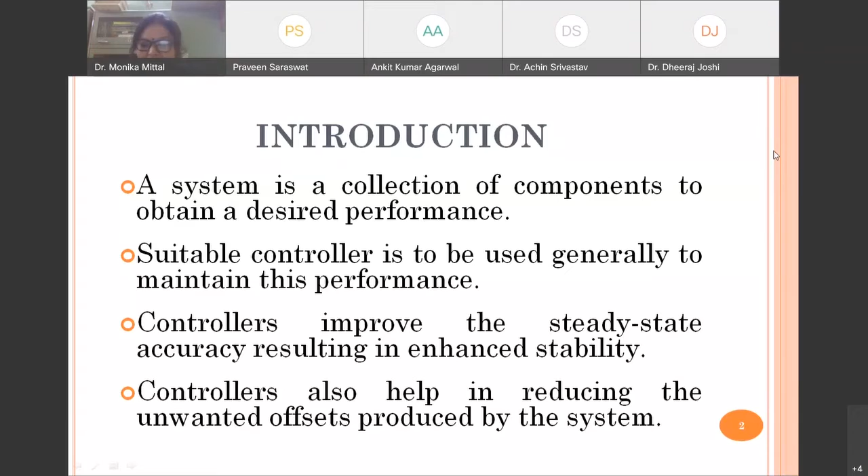So we can also say that controllers are used in a system, and now what is system, we have already explained. Now for controlling a system, first of all, we have to decide the variables which have to be controlled at the desired value. Desired value means our requirement. For example, the boiler's temperature is, for example, 300 degrees centigrade, then we have to set it at 300.

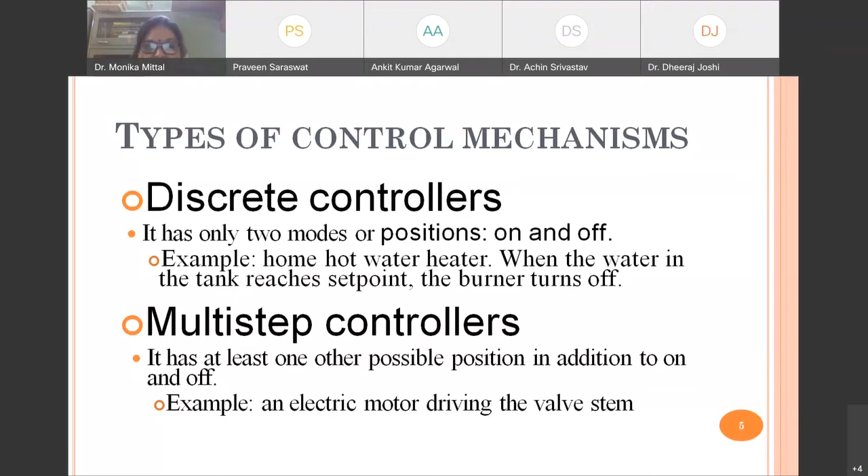The opening of the valve can be less, or the opening of the valve can be more, depending upon the control law which we obtain. So that means this is called the multi-step controller.

Next, the important controller which is normally used is the continuous controller. That means sometimes a system is such that we are continuously monitoring the output and continuously controlling it. So that is called a continuous controller. A PID controller can also be used in that case.

So in this case, this continuous controller is an automatic controller, and it operates automatically. It observes the variable and initiates the control action. And in a continuous controller, more than one variable can be there.

As in the previous slides, we took only one variable, the opening and closing of the valve, or at the center, opening and closing at the center. So that means only one variable is there, but it can be a number of variables.

So to adjust its output according to the parameter incorporated in the controller, we need three things: how much, how long, and how fast. How much means after what should be the time, or what should be the value of the gain.

How long means what is the time at which we have to open it, and how fast means what should be the speed. So these three things are important.

So accordingly, how much is decided by the proportional mode, and we call it the proportional controller. How long is decided by the integral mode, set by the integral controller. And how fast is decided by the derivative mode, called the derivative controller. So these are the various controllers.

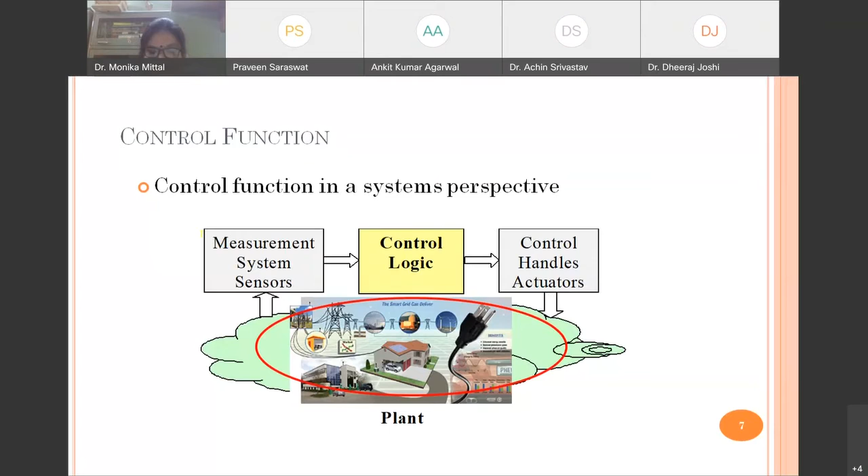So we can say in that case, the controllers are outside the system. They can be add-on, they can be part of the system. This is also possible.

Now the next is the analysis of control function. In that case, we have to obtain the system function. That means when we have to analyze, we need mathematical modeling. When we talk about mathematical modeling, the equation can be in three forms. Either we can write the dynamics of the system in differential form, or we can write it in transfer function. What is transfer function? Transfer function is the Laplace transformation of the output divided by Laplace transformation of the input, considering all initial conditions to be zero.

And the third case, we can write the system in state space equation. That also depends upon the number of variables. The order of the differential equation shows the number of states.

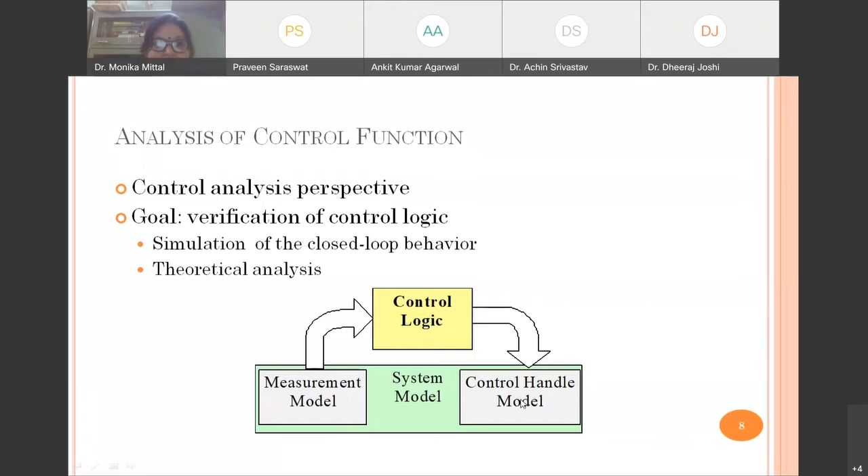So that means first of all, we have to write down the system model to analyze it. And then similarly, we are obtaining a measurement model. If number of variables are there, then we have to make a measurement model. And after that, control logic is obtained, because there are so many variables. And after control logic, we get some law, and we can handle this control model. So this is all about how we analyze this control function.

Now, what are the methods? How can we control it? These methods can be of different types. For example, if we consider design patterns, design pattern methods are used when softwares are software based. We can say software based methods, and softwares are available. For example, if we use SCADA, then we can design a controller using this SCADA. So that comes under design pattern.

When we say analysis template, in that case, as in MATLAB Simulink, you can make a model, and the controller is used directly as it is. Then that comes in the case of analysis template.

And now the most fundamental and widely used controller, as we have discussed previously also, either it can be proportional controller that increases the gain of the system, proportional integral controller, or we can say PI controller, and then PID controller. That means proportional, integral, and derivative. So all three things, how much, how long, and how fast, that is included in PID control.

The next, we have already studied switching control. In this, no mathematical equation is there, nothing is there, only we have to give the desired value. We are comparing, and there is only on and off position.

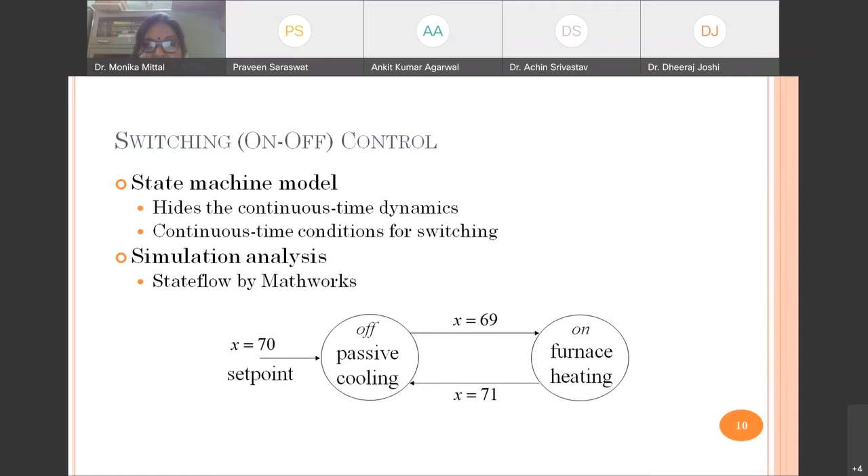70 is the set point. We obtain 69, then it is in the on position. When it becomes 71, then it becomes the off position. So this is just like an on-off type of control. It is used only when there is only one variable, and we are controlling in a very light mode, meaning the number of dynamic changes in the dynamics are not there.

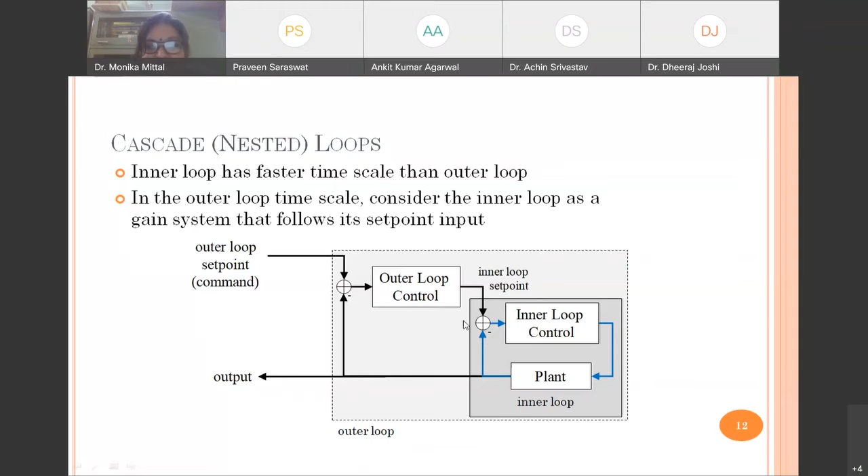Sometimes there is a small change in the environmental condition, and dynamics change due to that. Then we can control simply by using the inner loop control. But if this does not happen, then we have to go to the outer loop control. We can control the system using both controllers, but our choice is first to use the inner loop control because it is fast and less complicated. After that, if it is not controlled by using the inner loop control, then we have to use the outer loop control. So this is the next way.

Now, as I said, PID is the most employed or widely used controller due to its simplicity and low cost. It is commonly used in industry and control applications, if we have to control flow, pressure, speed, or other process variables, then we can use it. But the problem is that PID controller tuning is very difficult, and if some noise enters, then also we cannot handle it well.

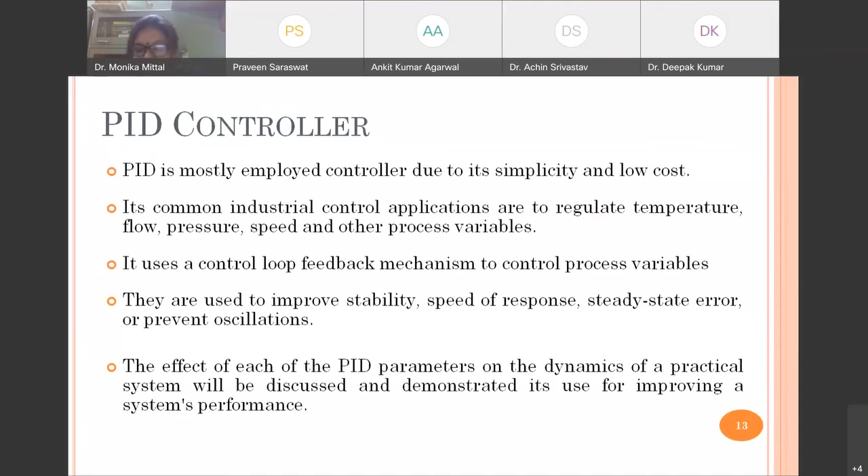Okay, so now we have to use a control loop feedback mechanism to control the process variable. As we have already discussed, controllers improve stability, speed of response, steady state error, and prevent oscillations. So in that case, what do we have to do? How do we do it? There are several parameters by which we can say our system is working properly or our performance is in our desired range, so we have defined some important parameters.

They are called rise time, peak overshoot, and steady state error. This should be the rise time, this should be the speed of the system, this should be the settling time, meaning at that time it should be settled out, and the steady state error should not increase beyond this much value. So these are the design specifications which are always given to a system.

First of all, we define what we consider rise time. It is defined as the time taken by the system output to rise from 10 to 90% of the steady state value. The requirement is that this rise time should be as minimum as possible, as it indicates the speed of the system. If rise time is less, that means the response is very quick; otherwise, the system is considered sluggish.

The next thing is bandwidth. This is very important. Bandwidth means the frequencies which are present in the signal. For example, if we consider a unit step input, remember its shape: it suddenly rises and then remains constant.

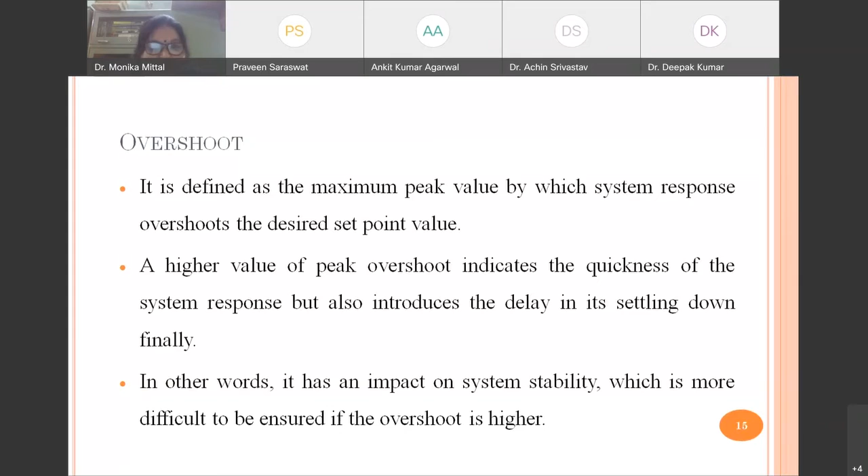Next, the parameter called peak value. It is defined by the response at the first overshoot, that means what is the value at the first overshoot. That peak denotes the peak value. If the peak value is on the very higher side, it will go beyond the operating range of the system. So this value is also related to the overshoot value.

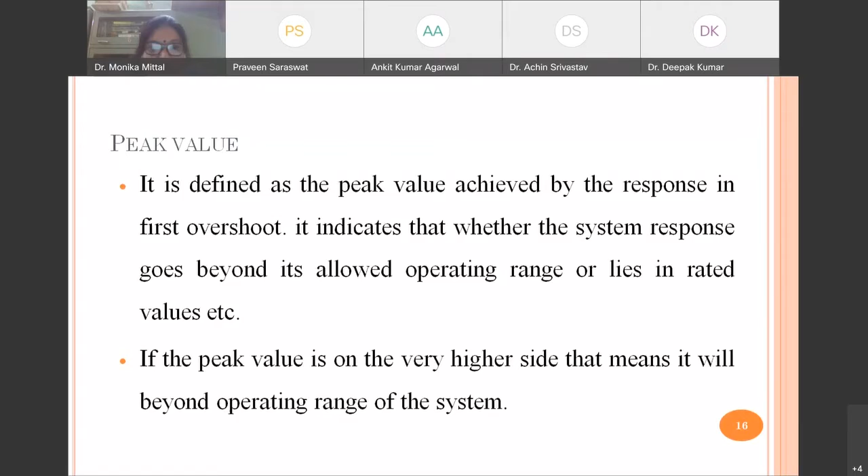The next parameters are settling time and steady state error. Settling time indicates the time taken by the system to settle down to its final value. Steady state error is defined as time t tends to infinity, or when it has to settle down, it should not increase the steady state error beyond 2% or 5% of the original value. All these parameters are very important.

According to these parameters, we can compare the three controllers: proportional controller, integral controller, and derivative controller, or combinations of these. Kp denotes the proportional controller gain. If Kp is increased, what happens? The rise time is decreased, meaning the speed is increased. The overshoot is increased. In the settling time, there is a very small change, and the steady state error is decreased. So we have to see what is the effect of Kp.

Similarly, what is the effect of Ki? If Ki is increased, the rise time is decreased, meaning speed is increased. For overshoot, it is increased, settling time is increased, and steady state error is decreased. So settling time increasing is the problem. We have to optimize Ki so that speed is increased but settling time should be reduced.

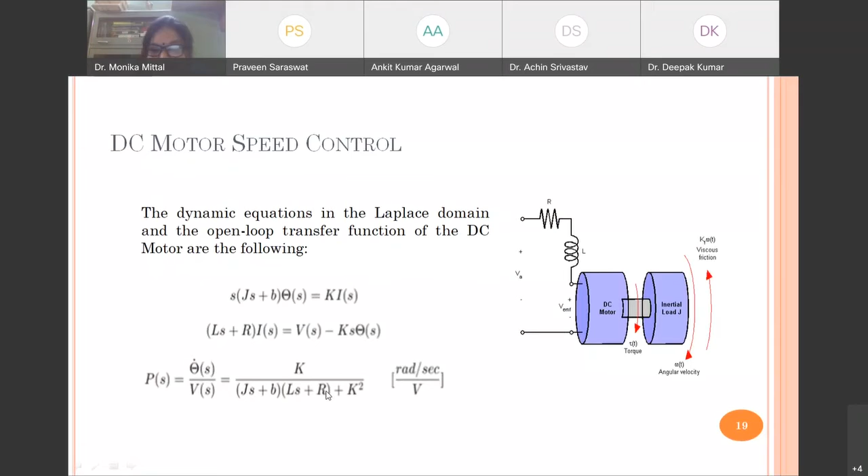To analyze this, I have taken a very familiar example of DC motor control. These equations show the dynamics of the DC motor. We take the Laplace transform and calculate the transfer function, which is the output divided by input in the S domain. This transfer function can also be represented as a block diagram, because in the DC motor there is an armature with some winding. LA denotes the inductance of the winding, RA denotes the resistance, some proportionality constant is there due to inertia, and speed is related to all that.

So all these things we can represent with the previous equations into a block diagram.

Now we have decided some desired specifications for running a DC motor. For example, 1 radian per second is the design criteria. Settling time should be less than 2 seconds. Overshoot should be less than 5%, meaning the maximum value plus 5% should not be exceeded. Steady state error should be less than 1%. So we have decided all these 4 parameters and put some limits.

Now we start one by one. If we have to do it, we simply do it in MATLAB. We have taken one example with these constants, fed it into MATLAB, and written its transfer function. Now, a proportional controller means only the proportionality constant is there. An integral controller means 1 by S is also there. Derivative means S is there in the S domain. So this is the overall controller we can take.

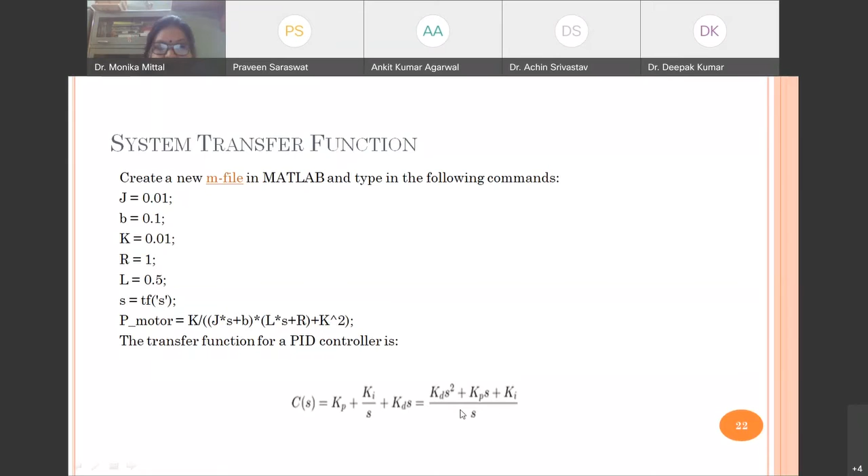Now we start with the proportional controller. We have taken the hit and trial method, and in the proportional controller, we have fixed, for example, the value of 100, which is a very high value. Using this program, we have obtained the step response of the DC motor.

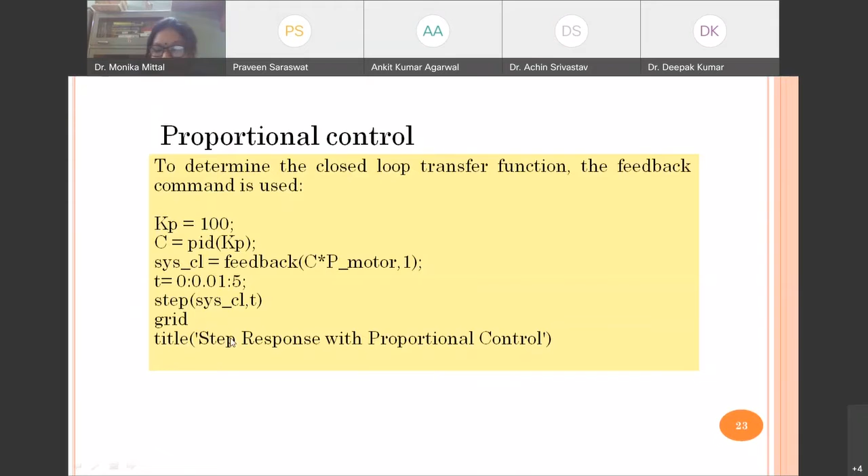So what do we find out? We get a step response. We can calculate the values by putting the cursor on that side, and by right clicking we can calculate all these values. What we observe is that both steady state error and overshoot are too large, because if the maximum value is 1, it should increase to a value not more than 5% above, meaning 1.05 should be the maximum. But it is increased much more than that, so this is the problem with using this much gain.

Steady state error is less, that is clear. But both steady state error and overshoot are too large, meaning they are not within the permissible limits given in our desired specifications. So it is known that increasing the proportional gain reduces the steady state error, but if we increase the value of Kp, overshoot increases, and it is already more than allowed. Therefore we have to use another controller or change the value.

So next we have taken the PID controller, meaning we have mixed all the controllers. We take, for example, Kp value of 75 and very low values of Ki 1, Kd 1, and according to that we get this performance.

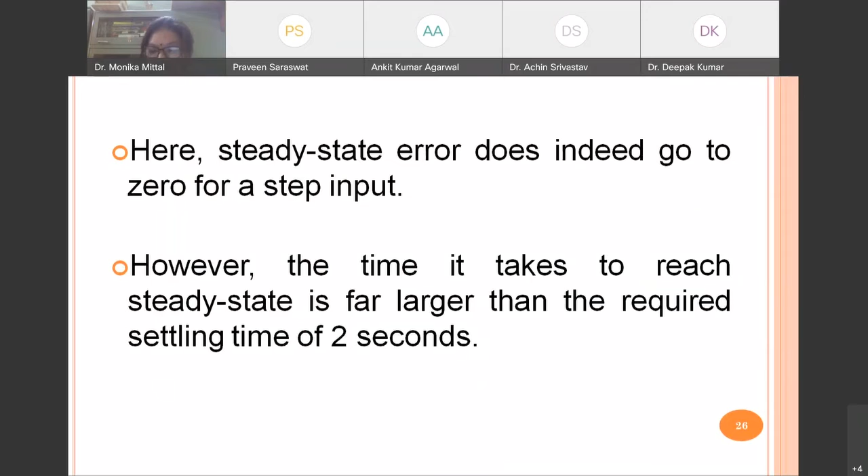In that case also, what we find is the steady state error does indeed go to zero for a step input, but the time taken to reach steady state is far larger than required. That means, compared to the previous case, the settling time is more. So this PID controller's values taken are not proper, so here we further change the values.

For example, we further increase the Kp. Ki is taken as 200, Kd is taken as 1. We obtain the response and further conclusions are made. What we observe is that the steady state error is now eliminated much more quickly than before, but the large integral gain has greatly increased the overshoot.

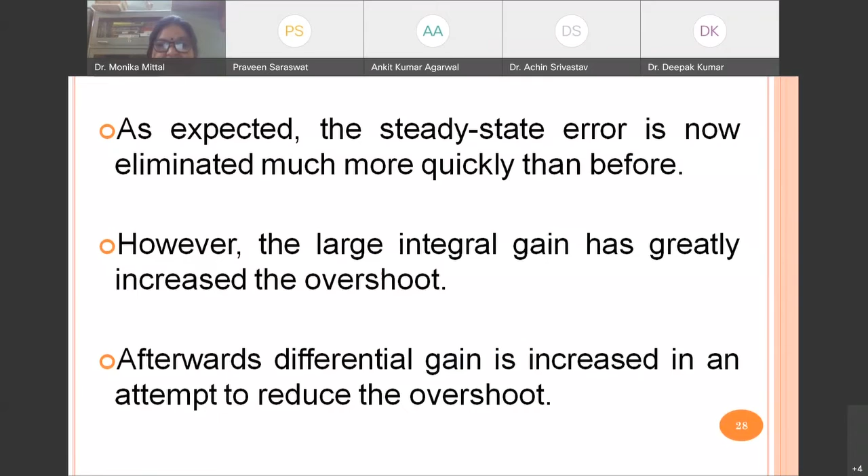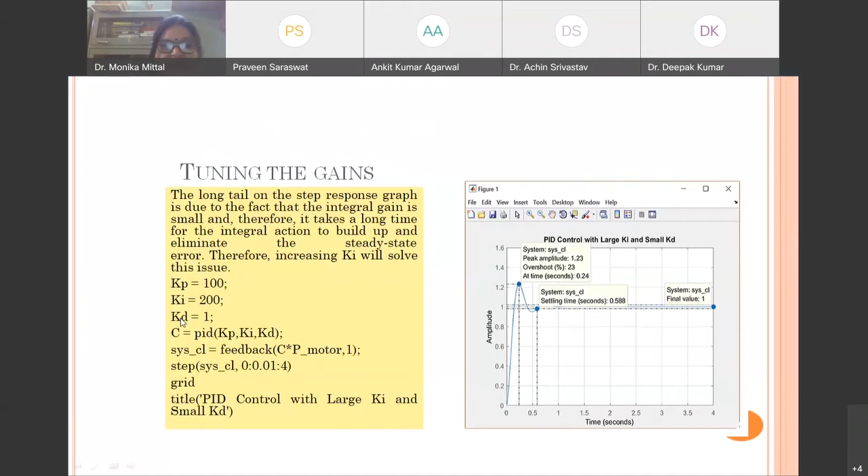So if we see the previous slide, now the gain has increased to more than 1.2, meaning this gain should be reduced. So further we have to change the value to reduce the gain by increasing the value of Kd. So next we have increased the value of Kd to 10. Like this we have optimized, and now we get our desired performance, meaning the values are within the range we had set.

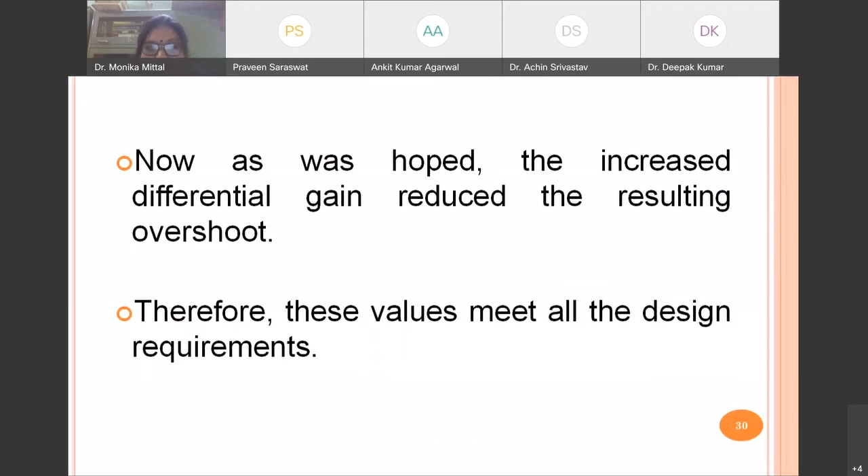So as was hoped, the increased differential gain reduced the resulting overshoot, and these values met all the design requirements. The important thing here is that we have used the hit and trial method, which is very difficult to tune. So we have to use some specified methods to tune it, and tuning is very, very important for a PID controller. We have to apply some criteria, for example Routh-Hurwitz criteria, which can give the range showing that if the gain values are increased beyond a certain value, the system becomes unstable, or using the root locus we can put some limits.

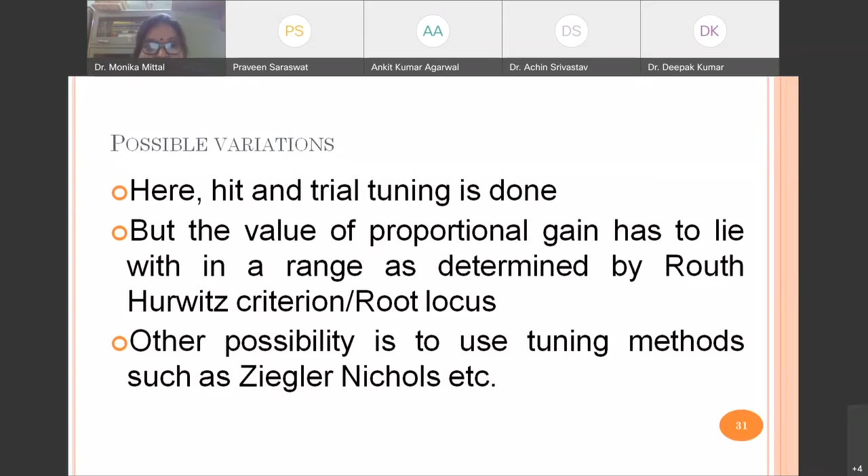After putting some limit, it is still hit and trial. So other possibilities, we can use the Ziegler-Nichols method. In that, specified tables are given. We have to decide the order of the system, and according to that, first the proportional controller value is decided, and then we can find the value of Ki and Kd. But in that case also there are so many problems.

So the next possible solution is we can use optimization techniques to optimize Kp, Ki, and Kd, because whenever three variables are there and there is some contradiction between them, we can formulate a problem and solve it using optimization. Or we can use some advanced variants of PID, like fractional order PID controller, multi-resolution PID controller. These are the latest controllers used nowadays.

So there are some merits and some demerits. We will discuss one by one. As we discussed, the multi-resolution PID controller has a property called multi-resolution.

That is, in the case we are using wavelets, wavelets have proven themselves as a very good noise reduction technique, and this property can be automatically used in noise reduction. Because when we use a PID controller, the main problem is tuning, and the second main problem is when some noise enters, we cannot use it directly. So if a controller is based on wavelets, the generated control signal enables determination of an appropriate threshold even in the presence of noise, due to their inherent multi-resolution property. And this obviates the need for further filtering - that means either we have to use a filter, or we can use this wavelet-based controller.

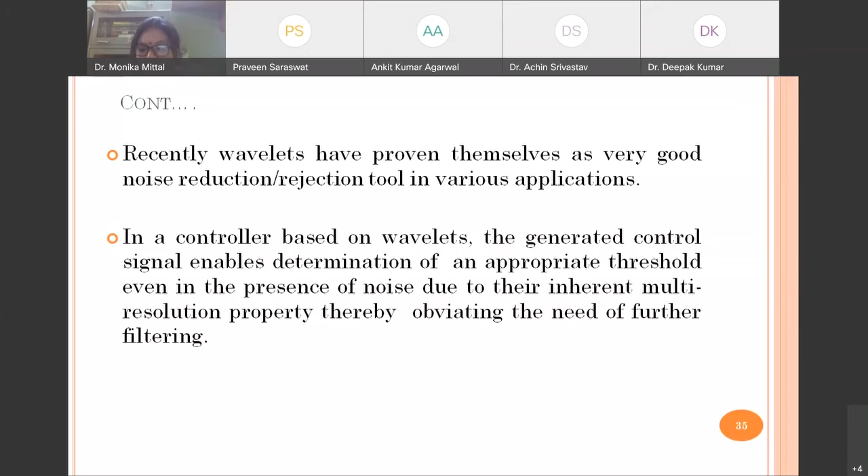So we can use that also. So what is a wavelet? Wavelet decomposition of the error signal at different scales provides better error resolution as compared to existing PID.

This MRPID wavelet-based controller is one such controller which is very effective in the presence of noise and environmental disturbance. So to achieve further improvements in performance optimization of the gain parameters, we have to compare PID and MRPID controller so that we can see the benefits of the MRPID controller.

Further, we can optimize PID gain parameters, which is very important - an optimization approach which can be based on fuzzy controllers. But if we use this, it increases the complexity of the system.

So there are some more intelligent control techniques available to calculate Kp, Ki, Kd - GA and PSO. GA means genetic algorithm, and particle swarm optimization techniques are available to optimize these parameters. But these are also very sensitive to disturbance. That means we have calculated the proper value of Kp, Ki, Kd using these optimization techniques, but if, for example, some noise or disturbance enters the system, then we can't control the system.

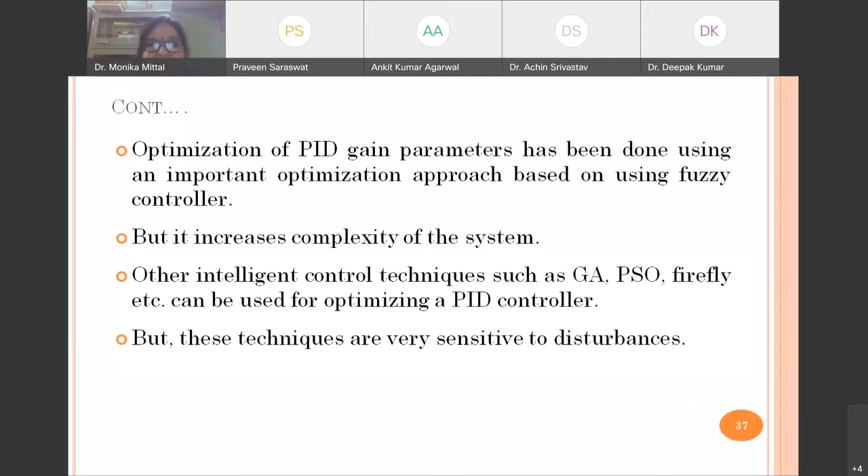So for that, MRPID is the best way - that means to denoise the system, and then we can control it. So next, we are going to look at how MRPID can be applied.

Before that, we go for signal transform, because whenever we apply some transform technique, we have to convert a time domain signal into a frequency domain signal. So what is signal transform? We know that a signal exists in the time domain, and to analyze it we have to convert it into the frequency domain so that we get more information. Fourier transform is one of the most common transform techniques we can use to get the frequency contents from a time signal.

But there is a localization information problem - localization information means at which instant these frequencies are present, we can't know from the Fourier transform. That means time information is not there. So to avoid that problem, short time Fourier transform is done.

What is short time Fourier transform? Whenever a signal is there, we select a very small window, then we put that window on the signal, superimpose that window, and we obtain the Fourier transform by multiplying that window. So if we multiply the window, what will happen? The Fourier transform gives the frequencies present in that window.

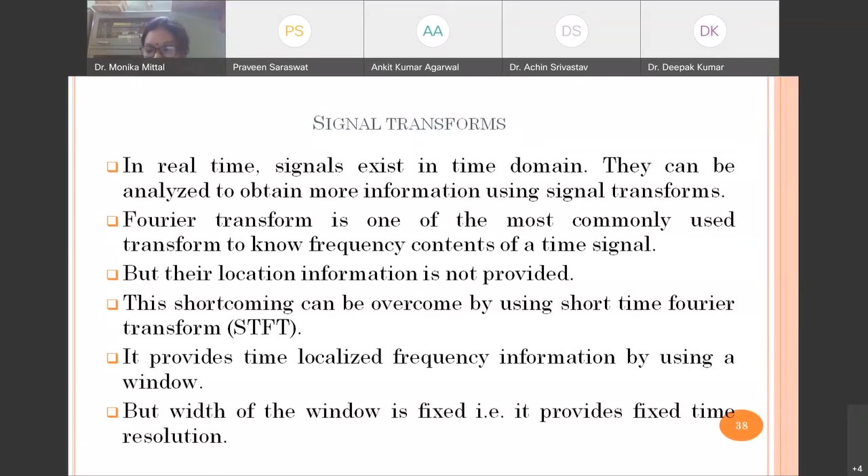If we have to decide the window size, due to high frequencies we have to decide a smaller window size, but due to slow variation we have to decide a bigger window size. That means if a smaller window size is selected for a signal where both slow and fast variations are present, a lot of redundant data is obtained. This is a problem because we cannot change the window size once it is fixed. So this problem remains in short time Fourier transform.

Both are reversible, that means from time domain we can convert into frequency domain, and from frequency domain we can convert into time domain. When time domain is converted into frequency domain, it is called Fourier transform. When frequency domain is converted into time domain, it is called inverse Fourier transform. This example is very comfortable because only 3 frequencies are there.

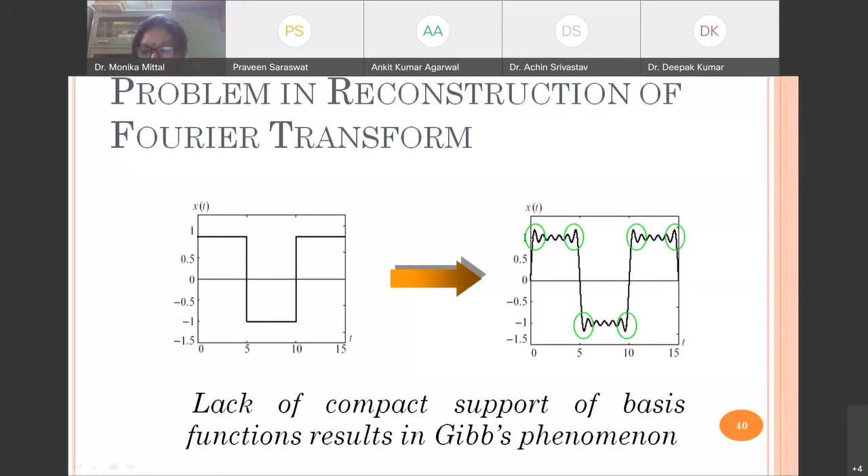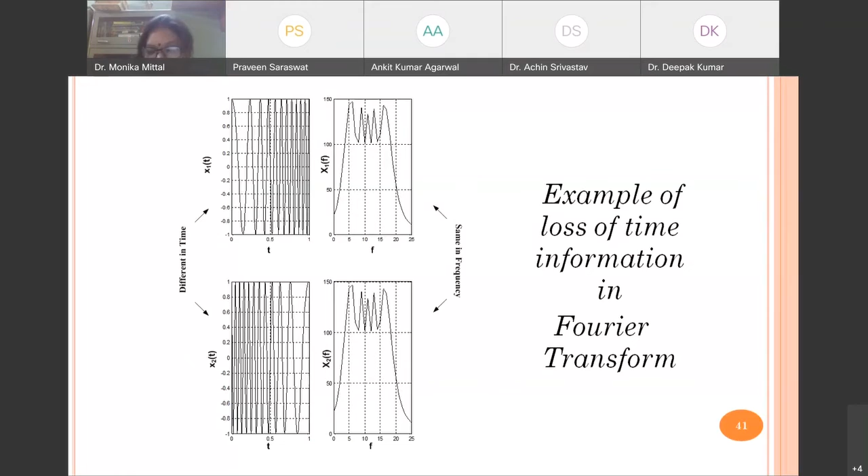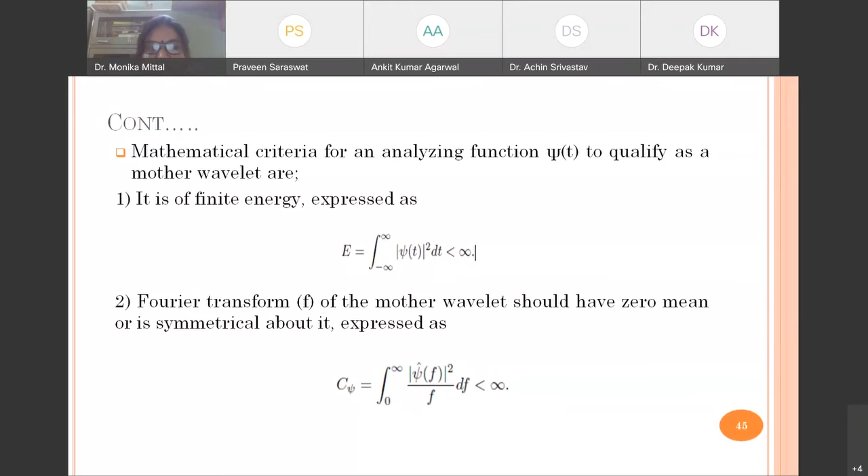If we take the Fourier transform, it should have zero mean. So if our signal or particular wave fulfills these two conditions, then we can consider it as a wavelet. So what is the mathematical expression? This is the mathematical expression for the wavelet.

And when the window size is taken, it should be shifted, so the shifting parameter is also increased. And this is the scale parameter, which is also increased. So this gives us time information. This is the formula for the continuous wavelet transform.

Now this continuous wavelet transform has a facility that we can take any scale, like 0, 0.1, 0.2, 2, 4, up to infinite. That means if there is no limitation, a lot of redundant data can be obtained. So instead of using continuous wavelet transform, we use discrete wavelet transform.

Discrete wavelet transform means we are only using a dyadic scale, that is, the scale is changed in powers of 2. So some condition is imposed, and as it is in the power of 2, we can easily connect it with filters, program it easily, because power of 2 is related with binary numbers.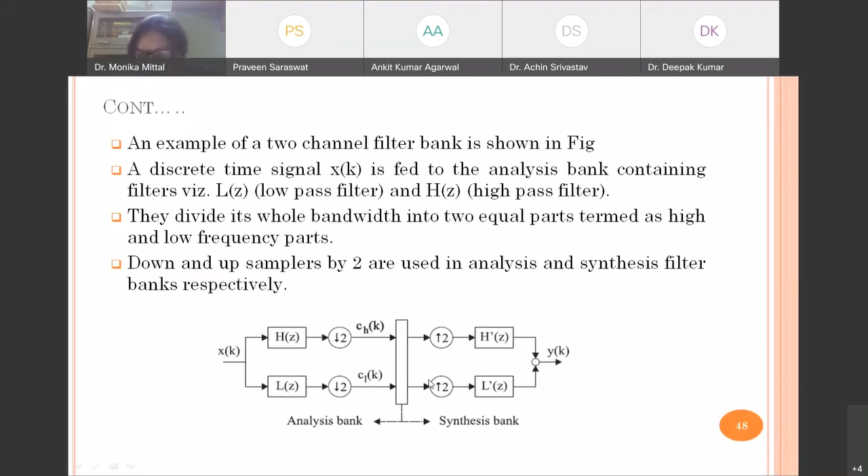If we have to further combine it, we have to take the upsampler. This is the mirror image of the high pass filter, and this is the mirror image of the low pass filter. After combining, we get this y(k). So in between them, we can filter it, and that's why we can denoise using filter bank analysis.

Now there are various types of wavelets available, both continuous and discrete. Different types of wavelets are the Haar wavelet, Daubechies — the name of the scientist — Symlet, Coiflet, Morlet; all these wavelets are available. First is Morlet.

Now if we see, a small wave is there. If we take the mean, positive and negative area is the same, so it obeys all our conditions. Similarly, this is the Haar wavelet; it also obeys all our conditions.

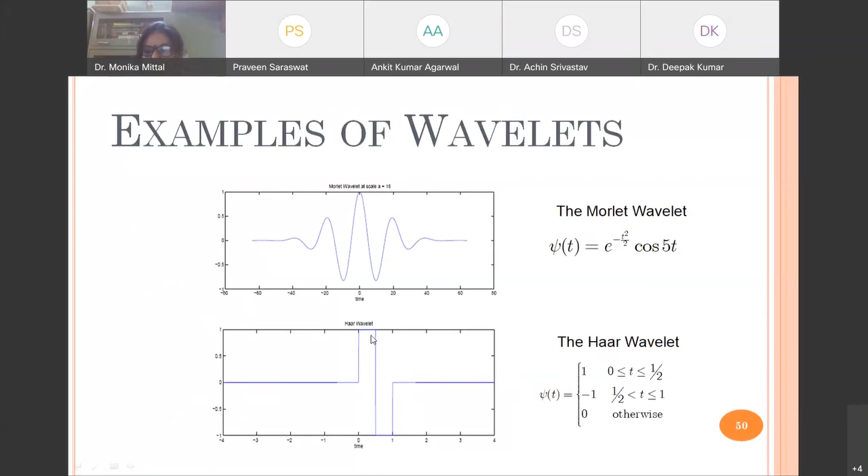in PID controller. So what we can say is that selection of a proper wavelet is very important in wavelet analysis, because there is a direct correspondence between the wavelet shape and the signal shape, due to the underlying correlation operation.

So next is how we do denoising using wavelet. Now I am going to discuss wavelet based denoising to see the effects on the performance of a PID controller. So we are combining wavelet based denoising with the PID controller.

Why? Because the PID controller is very simple, and if we also use wavelet based denoising, it denoises the disturbance. So automatically the combination gives us a very good result.

So here what we are saying is that a signal is usually corrupted by noise during its acquisition or transmission. It degrades the performance of the system. Hence, effective denoising is necessary.

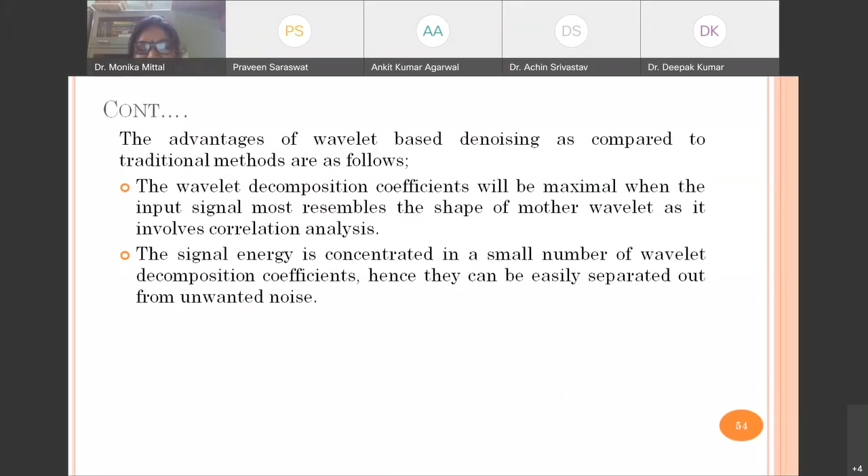So this is the advantage of wavelet based denoising as compared to the traditional method. The wavelet decomposition coefficients will be maximum or maximal when the input signal most resembles the shape of the mother wavelet, as it involves correlation analysis, which we already discussed. The signal energy is concentrated in a small number of wavelet decomposition coefficients, hence they can be easily separated from the unwanted noise. So these two things are very important in this case.

Now this is the main block diagram of how we applied wavelet based denoising. As we considered the normal block diagram, some input signal is there, or we can say the input signal or desired set point signal that is given to the system. Now here Gaussian noise is entered into this signal. For example, we have set the temperature to 300 degrees centigrade, and some noise is entered. So when this set point goes to the plant, it changes due to this noise part, which is very difficult for the plant. Then what should be the controller we are using? Because control only depends upon the error.

So when noise enters on the input side, what we have to do is use this DWT transform. Whatever noisy signal is obtained, we take the discrete wavelet transform, and using that there is noise elimination by proper selection of the thresholding method. After using the thresholding method, we combine the rest of the coefficients and convert into time domain, meaning inverse discrete wavelet transform is taken, and the output is the denoised signal. So by this process, the input signal which is corrupted due to Gaussian noise is denoised.

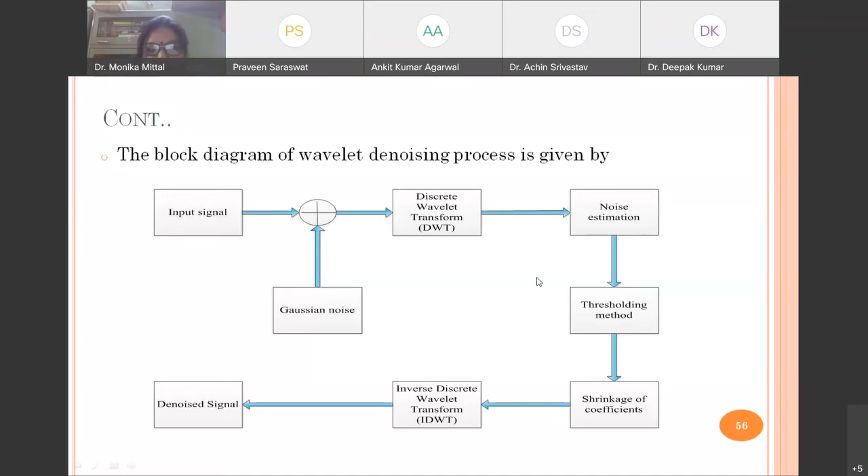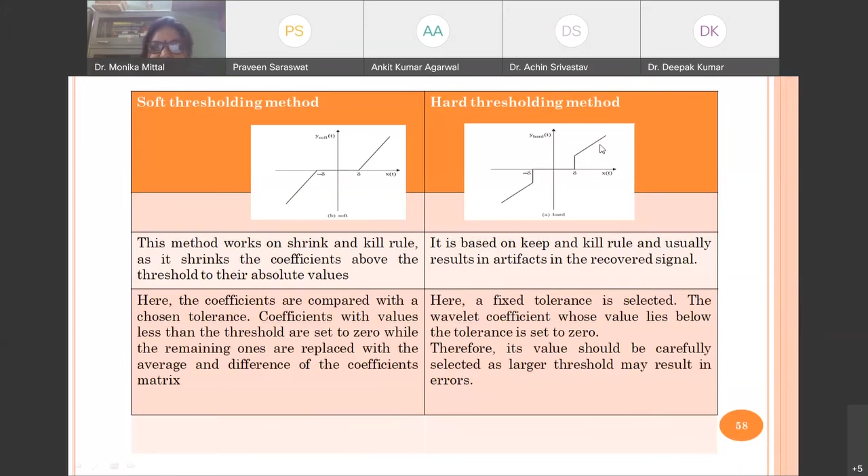When we consider hard thresholding, here also some dead part is there, meaning for a certain amount of input, no output is there. Then a DC component is also there, meaning this part is also present, a constant increase of output, and then it increases linearly. So this is the difference between soft thresholding and hard thresholding.

Now I have taken two very familiar examples, a thermal system and a DC motor, which are considered to verify the utility of advanced control strategies over the conventional control approach. This thermal system is very important if we consider chemical reactors, food industry, power industry, etc. If we take a thermal system, we can use it in these industries. A small change in temperature, if chemical reactors are involved, may cause failure of the whole system. So in that case, sometimes temperature control becomes a very essential part.

The next important application is DC motor. DC motor offers a wide range of possibilities with respect to precise speed control and can develop constant torque over the wide speed range. So this is also very widely used in industry, DC motor.

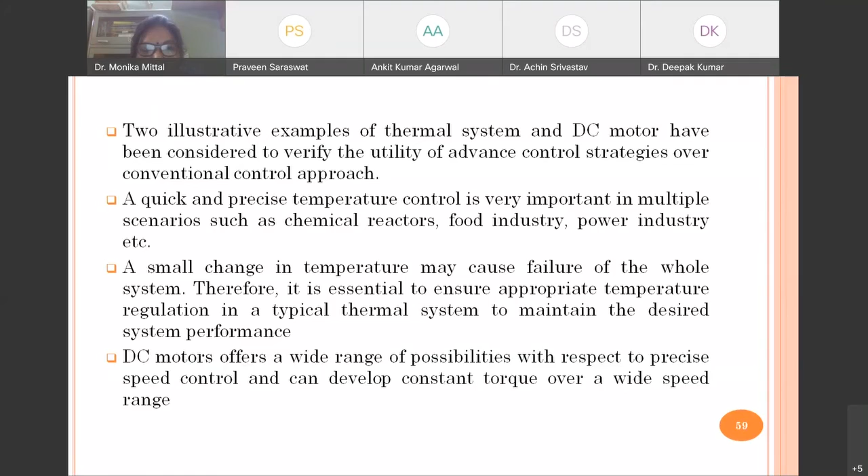So this is the block diagram. Air flows through the pipe. There is a heater which increases the temperature. Now this temperature is measured using a thermistor. Whatever temperature we get, we call it the system output. This system output can be seen using a CRO also, or the system output is compared with the reference signal.

The reference signal means whatever temperature we have set, that is converted into an electrical signal. This temperature is also converted into an electrical signal. Now it is compared. If there is some difference, some error is there, we obtain an error signal. If error is there, the controller starts working. The controller output can also be seen using this CRO. This control gives some control signal so that the heater is in on and off position. So this is the whole process of the thermal control system.

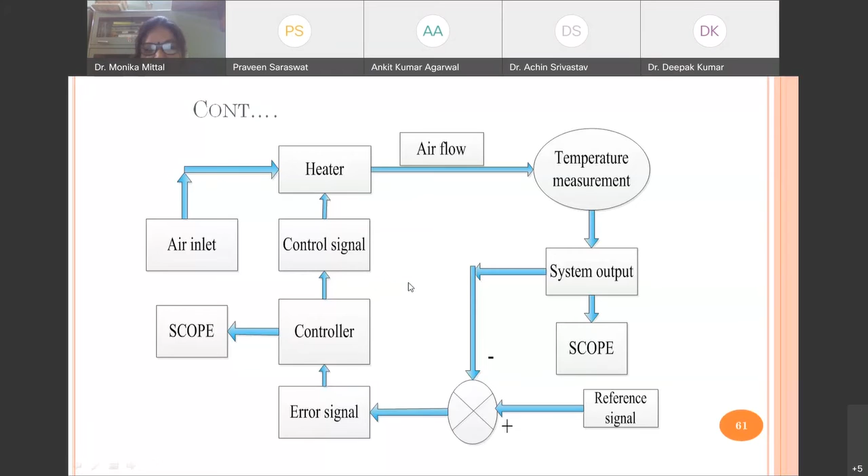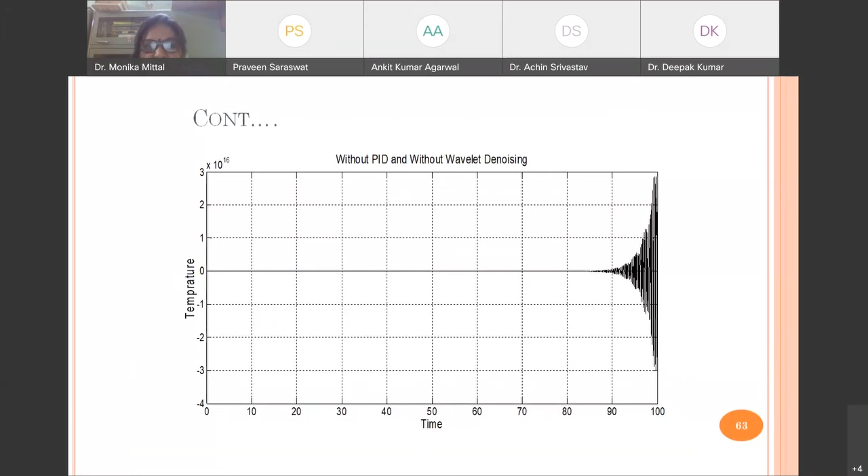So for example, a PID controller is connected to that particular system with a step input. That means the reference input which we have given is a step input, and this is 1 unit. So the output is compared, whatever output is there, converted into electrical signal, and that is compared with the step input. Both are compared. When some error is obtained, the PID controller comes into the on position, which gives the indication to the heater to switch on and off.

If this peak overshoot is permissible, that means this much temperature is permissible, that is proper. And this Kp, Ki, Kd values are calculated using the Ziegler-Nichols method. Here it is properly tuned, that is okay.

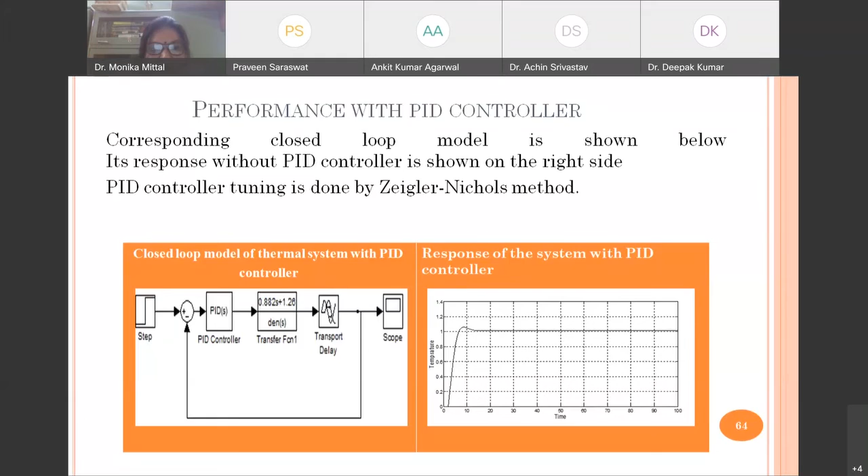But what will be the problem? Whenever noise enters at the input of the system, the performance associated with the PID controller deteriorates. And even if we increase the gain value or change the value of the derivative, the performance is still very poor.

So for example, in the next case, the step input is the same, meaning our requirement is to set at 1 amplitude. We are adding Gaussian noise. The worst case is when the noise enters towards the set point. Now this Gaussian noise is added with the set point, and the error comes according to that. So there is total confusion.

And what will happen due to this noise? When the PID controller controls, the output is like this, meaning it will never settle down. So much oscillation is there, so much noise is there.

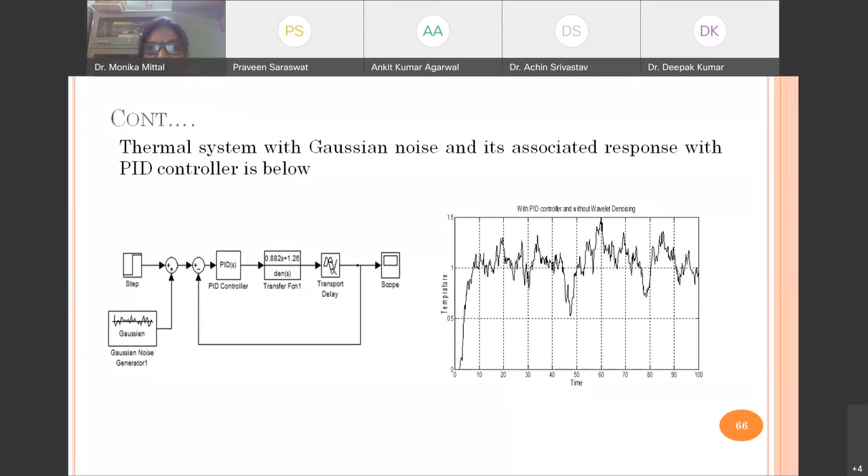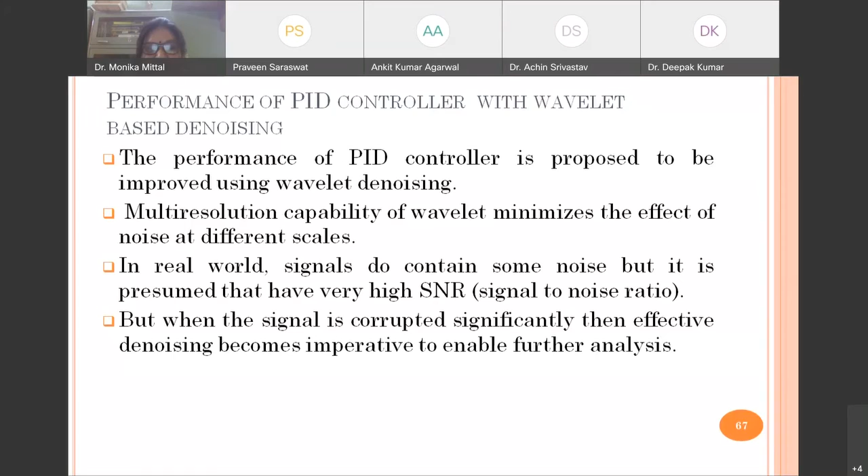So we cannot use this type of controller to set the value of the temperature. So that totally fails. So what we can say is the performance of the proposed PID controller can be improved if we use wavelet based denoising, which I have explained previously. The multi-resolution capability of wavelet minimizes the effect of noise at different scales. And for signals which contain noise, we can calculate signal to noise ratio, and signals which are corrupted significantly can be effectively denoised using these methods.

So what are we doing? In this case, same system, step input is there, and Gaussian noise is added. Now we are connecting wavelet denoising, which we have told you earlier. Due to this wavelet denoising, we get the denoised signal, which goes here, and the rest of the block diagram is the same, PID controller and all that. So what we observe is that due to this wavelet denoising, the multi-resolution property of wavelet reduces the impact of noise at various scales. That means before going to the PID controller, before obtaining the error, we have denoised the signal.

And here I have used two types of wavelet, one is the Haar wavelet and the other is Daubechies' wavelet, and then they are compared. So what do we observe now, what are the values?

What do you mean by scale? When I showed you a filter bank, I showed you 2 levels. That can be up to 6 levels. 6 levels means filtering is done at the 6th level. Dilation, translation, that becomes at the level of 6. So we start with the level.

First of all, the signal is there. We convert it into high frequency and low frequency signal. The highest frequency is separated out. Then the remaining frequencies come, and further they are analyzed, and one more highest frequency is separated out. Further, we get some approximate signal, and the process continues. If it goes to level 6, 7, 8, and 9, at each level we use some thresholding methods, and then we reconstruct the signal. So what we find is that at level 9, we get the proper waveform.

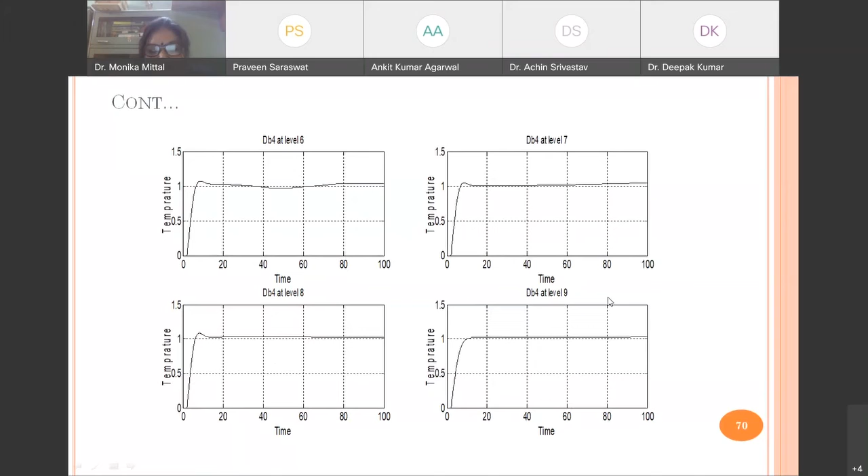Similarly, the same can be done using Daubechies' 4 wavelet. Here also we have used levels 2, 3, 4, 5, 6, 7, 8, 9, and we have observed that at level 9, it is totally controlled.

Now to see the effect quantitatively, as we know, the performance is compared only when the 4 important parameters are calculated. So we have selected levels 6, 7, 8, 9. The same levels are selected in Daubechies' also: 6, 7, 8, 9. And the 4 parameters, as I told you earlier, rise time, settling time, overshoot, and peak value, are calculated for each level.

If we compare at level 7 also, the same theory holds, meaning Haar wavelet is quicker compared to Daubechies' wavelet for this case. We cannot say this for every case, but for this case, Haar wavelet shows a better response than Daubechies' 4 wavelet for rise time.

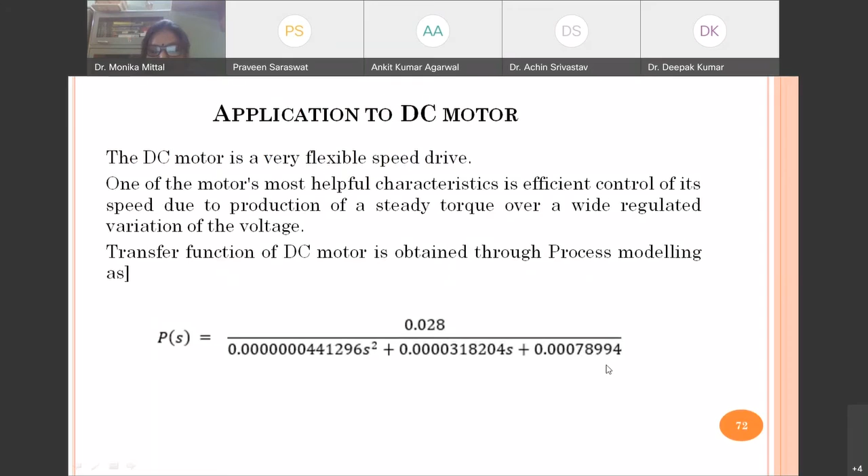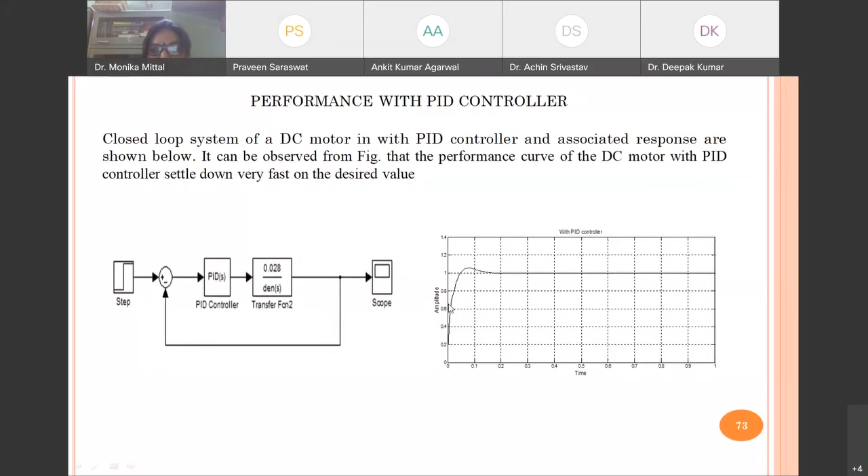Now the next example is taken for a DC motor. In the case of the DC motor, the dynamics equation is already written in the previous slide, and some parameters are already taken, and we have calculated the transfer function. So this is the block diagram. Initially, when a simple PID controller is used, this gives a very good response.

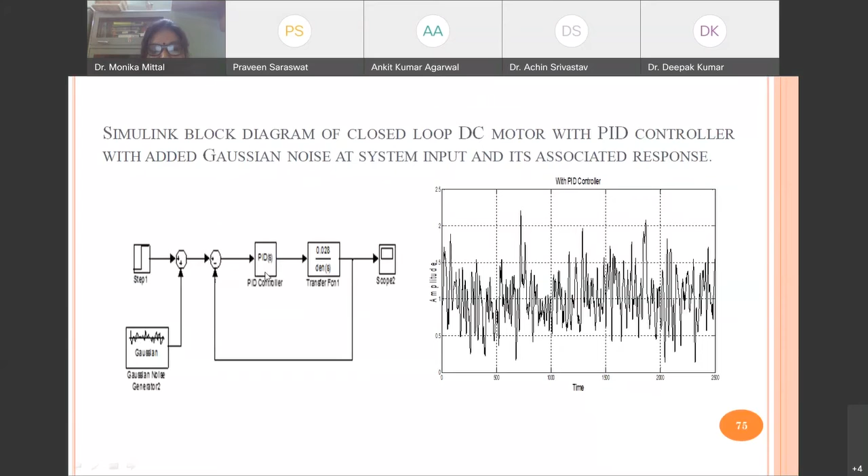But when noise is entered by the same method as we entered in the case of the thermal system, what will happen? Here Gaussian noise is added, step input is there, and no denoising method is used, but PID control is there. This is the response, meaning it is totally corrupted. So that means some denoising method should be used with the PID controller, otherwise there is no use.

So next, the wavelet denoising method is used. Same theory is applied: Gaussian noise is added to the step input, wavelet denoising is used, and after denoising it goes to the system where the PID controller is already connected. Both wavelets are used, Haar wavelet and Daubechies 4 wavelet, with the same levels taken.

Similarly, this is obtained for the Haar wavelet. Next, we have compared all four parameters - rise time, settling time, overshoot, and peak value - for both Haar and Daubechies wavelet, with levels kept the same. Here we observe the rise time should be as minimum as possible.

So if we compare these two, the rise time is less compared to Haar for all levels. Similarly, settling time should be as minimum as possible, and in this case settling time is also very less. If overshoot and peak value are permissible, then we can observe this value.

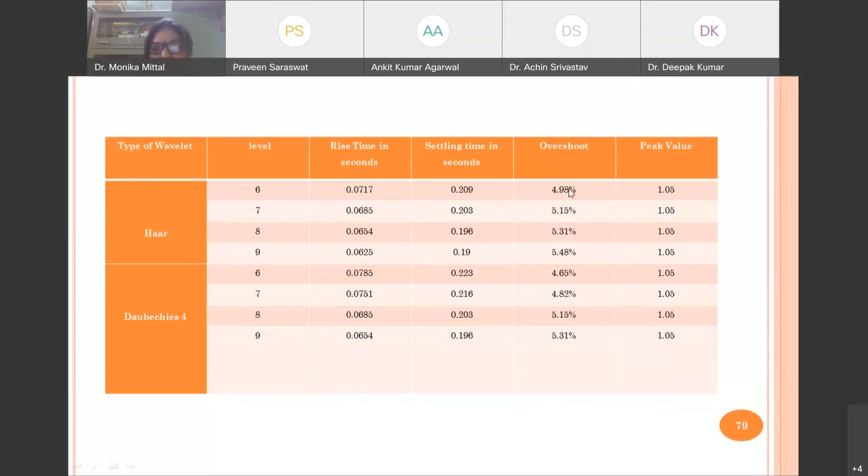So we can find some observations: the response of both the thermal system and the step response of the DC motor improves in the presence of noise by using both Haar and Daubechies wavelet based denoising. This is the first observation.

But the improvement in performance is better in the case of Haar wavelet. This is due to the fact that denoising performance is better when the wave shape of the wavelet is more similar to the shape of the signal being denoised. This was already discussed, as I have given - if you see, the step input is there.

If you remember the shape of the Haar wavelet, it is just like this. So if we calculate the correlation between this step input and the Haar wavelet, this correlation is very, very good - the same type of wave shape is there. Whereas if we consider the Daubechies 4 wavelet, if you remember, it is curved in nature, so the correlation is poor.

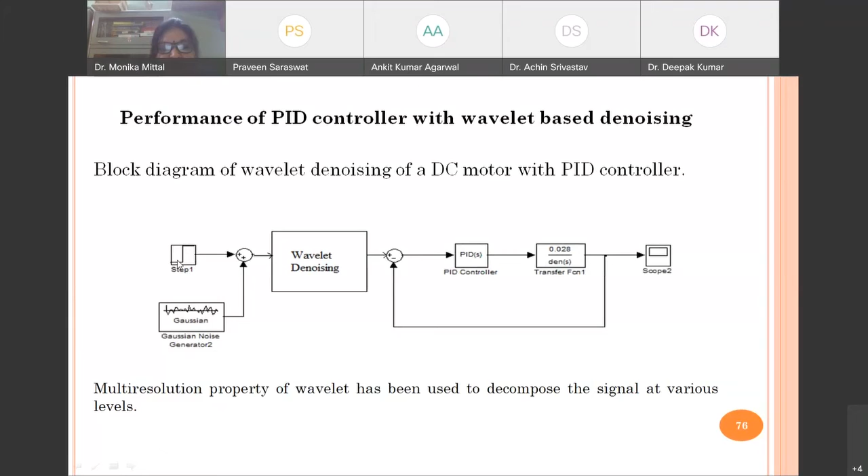So that's why the second observation is: the results are good in the case of Haar wavelet because the wave shape of the wavelet is more similar to the shape of the signal being denoised, since the step waveform and Haar wavelet have the same shape.

Now the next variant, the FOPID controller. FOPID is nothing but fractional order PID controller. In that case, for the PID controller we have considered 3 gains - Kp, Ki, and Kd - proportional, integral, and derivative controller constants. If the order of

Ki and Kd is taken as a fraction, then that is called fractional order PID controller. And from the last few years, we have taken FOPID and considered this as a modern controller as compared to PID controller. This is an extension of the PID controller, and it is based on fractional calculus.

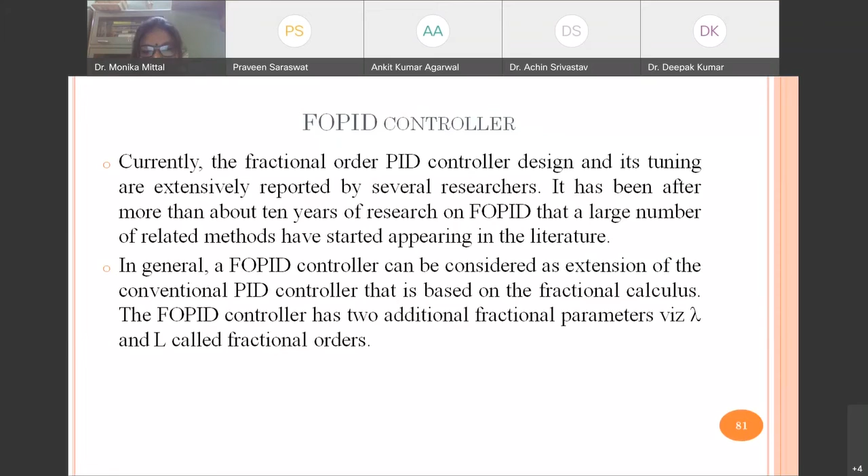Two more parameters are taken, lambda and L, and how they are related and applied is very clear from this block diagram. Kp, Ki, Kd - these are well known PID controller constant values. The error signal is multiplied by that.

Now here one more parameter, D means derivative. Negative power means 1 by S. So this 1 by S is considered to the power of minus lambda. If lambda is less than 1, we can consider this in fraction form.

This is not an integer. Similarly this shows differentiation, S to the power L - if we take L as 1 by 2, that means we have taken it in fractional form. So the difference is that here Kp, Ki, Kd is applied, and in place of the PID controller we are introducing lambda and L, converting it into a fractional order PID controller. So what is the effect of using this?

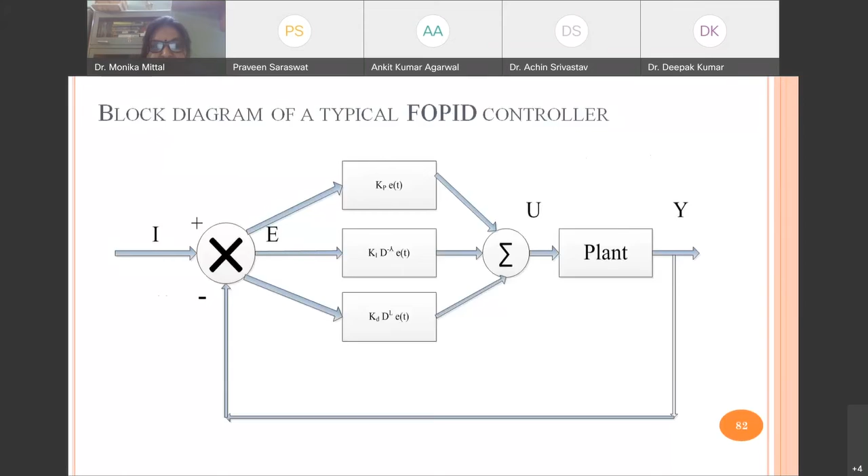So this is the equation - the error equation is multiplied in that. If we, for example, consider lambda as 1 and L as 1, it is similar to the PID controller. If we consider L as 0, this could become a PI controller. And if lambda and L are in fraction, then it converts into FOPID.

So here all the things which we have done with the PID controller can be done with the FOPID controller. Now the next important modern controller is the MRPID controller - that means PID is mixed with the multi-resolution property and then converts into a multi-resolution PID controller.

Initially what we have done is denoising - wavelet denoising is used as a separate third party, meaning different software is used to denoise it. The system is different; we are using a different software. So two software packages have to be used.

But if we have to work online, then we combine PID with multi-resolution property and convert it into MRPID controller. Now we can do this using a single software.

This is the latest controller, called the multi-resolution PID controller, based on the multi-resolution property of the wavelet. This helps in generating the control signal under various noise, distortion, and uncertainties, obviating the need for further filtering. This property is also used in wavelet denoising methods, but that is applied offline. Now it can be applied online.

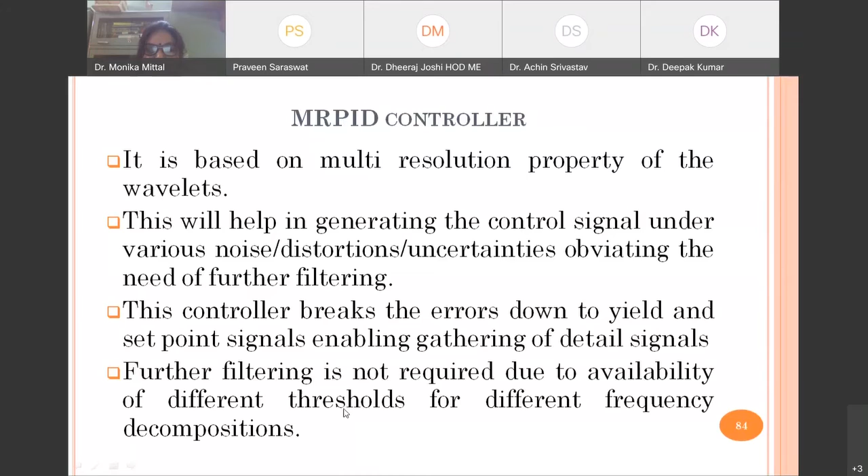This controller breaks the error down to yield, and set point signals enabling gathering of detail signals. Further filtering is not required due to the availability of different thresholds. In the previous case, when using wavelet-based denoising, we had to decide threshold values to denoise it. But here there is no need to choose the threshold.

The optimized weighted matrix - after obtaining MRPID, the Kp, Ki, Kd values can also be optimized using some control techniques, so this is also very effective. The important thing is that this MRPID controller is very effective in the presence of noise and environmental disturbance.

If you remember, this is the PID control equation. Error is simply multiplied by the proportional controller, integral controller, and differential controller. This is the general equation of the PID controller. Now we have to convert this PID controller equation into the MRPID controller equation. So how are they related?

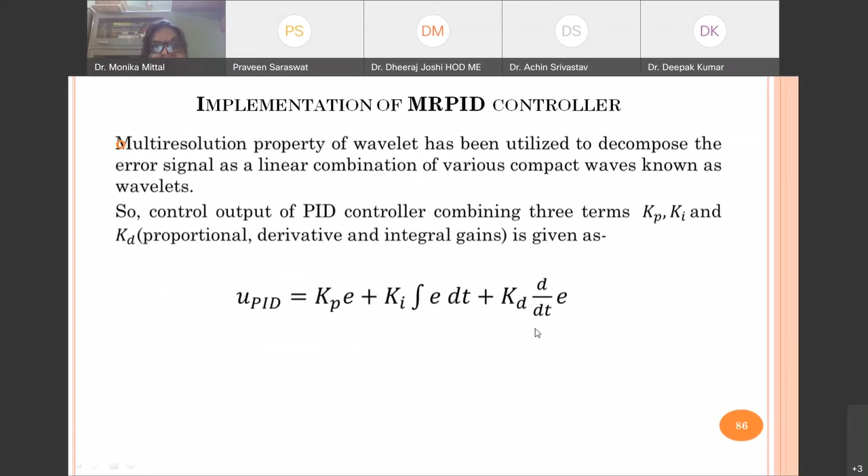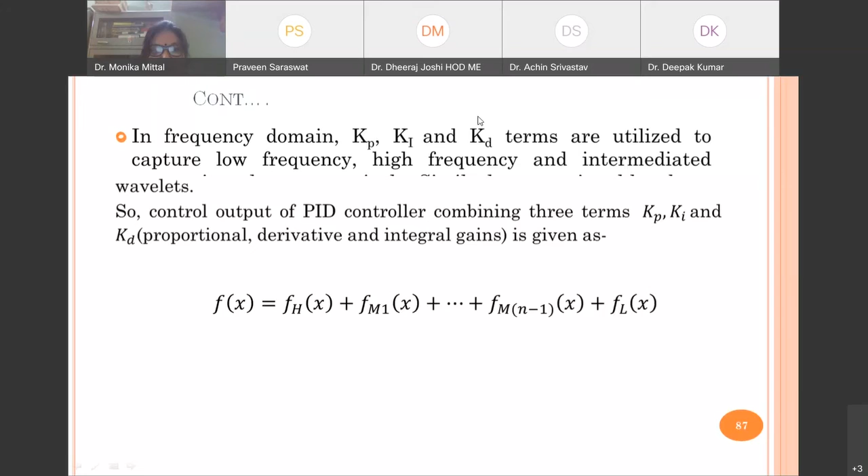For that, what MRPID controller property does is relate whatever frequencies are present into levels, and these frequencies are separated out. That means if a signal has a number of frequencies - highest frequencies and medium frequencies - we have converted the whole signal into the frequency domain like this.

Now what we do in the MRPID controller is divide it, because we have to compare with the PID controller, so we divide it by frequency. The high frequency component is denoted by fH. The lowest frequency component is known as fL, and the medium frequencies are denoted by their own symbol.

Now we can compare between the two - the simple PID controller and this equation of the MRPID controller. So what we observe is: if fH is related with some KP, KI, KD; fM is related with some KP, KI, KD; and fL is related with some KP, KI, KD - then we can compare it.

So what we observe: for the proportional controller, low frequency is present - that means the lowest frequency present in the signal. The scale is similar to KP. The highest frequency is related with KI, and the center frequencies are related with KD.

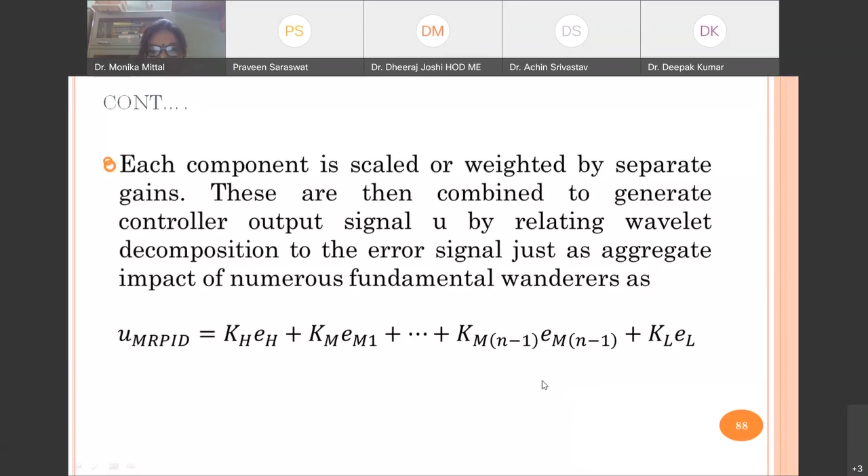That means we are comparing between the two, and then we can convert into a block diagram just like the PID controller. Whenever some plant is there with an output, we measure the variable using sensors, compare with a set point, calculate the error, and then use a PID controller. Now in place of the PID controller, wavelet decomposition is used here.

This error signal is decomposed into various frequencies, and these frequencies are converted into various coefficients. So this value is related with the highest frequency, KL is related with the lowest frequency gain, and these are medium frequency. Here, KH is considered for KI, KL corresponds to KP, and we take the average of all the medium frequencies and consider this as KD.

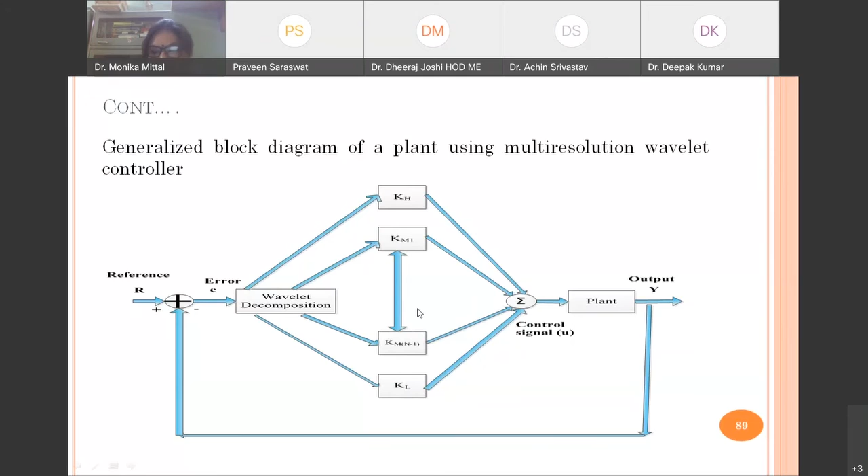So in this block diagram, everything is the same, and we have compared it. Now what steps need to be taken? Multi-resolution analysis has been done.

The error signal is decomposed using DWT, and some scaling is done. Scaling means, for example, 3-level scaling means we have taken only KP, KI, and KD, which relate to KL low frequency, medium frequency, and high frequency. So scaling has to be decided.

Then we select what the value should be, and then we decide the value of the gains. So these following steps are the extra steps, and then we design the MRPID controller.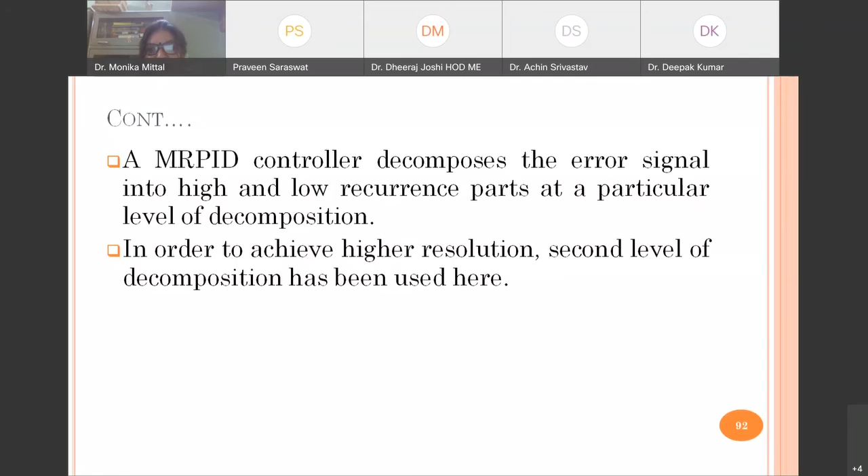After designing this MRPID controller, it decomposes the error signal into high, low, and medium frequency parts at a particular level of decomposition. We find that the control output of the MRPID controller is a linear combination of three terms: KH high frequency value, KM medium frequency value, and KL low frequency value. The same approach is applied to both the thermal system and the DC motor system.

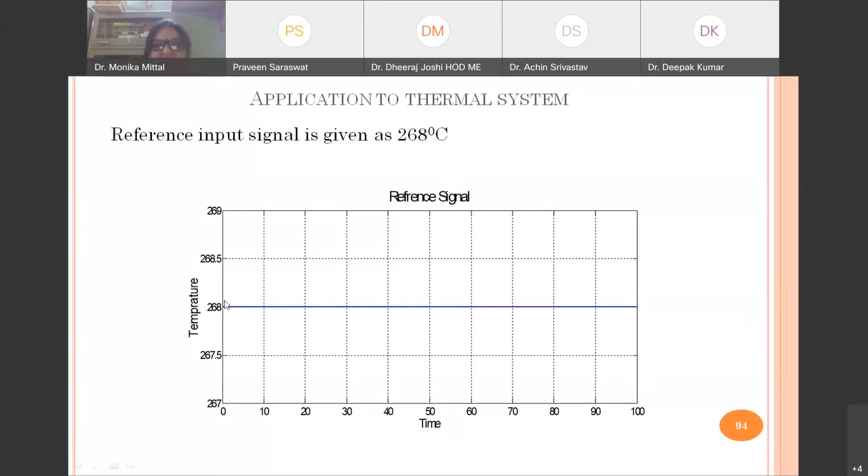So here we have taken a reference signal. For example, I have set the value of the temperature at 268 degrees centigrade as a reference signal, and the same system is taken.

To compare, here a block diagram is drawn, and now these controllers are taken one by one. Three switches are connected. First, switch 1 is connected, meaning only the PID controller is connected with the thermal system. Next, switch 2 is connected, with 1 and 3 not connected, meaning FOPID is connected with the same system. Similarly, in the third case, the MRPID controller is connected to the thermal system.

So now we can clearly compare the effect of noise when the PID controller is there, when FOPID controller is there, and when MRPID controller is there. We can also see, when noise is not present, what is the comparison? Because if noise is not there, the PID controller gives a very good response, a good performance curve.

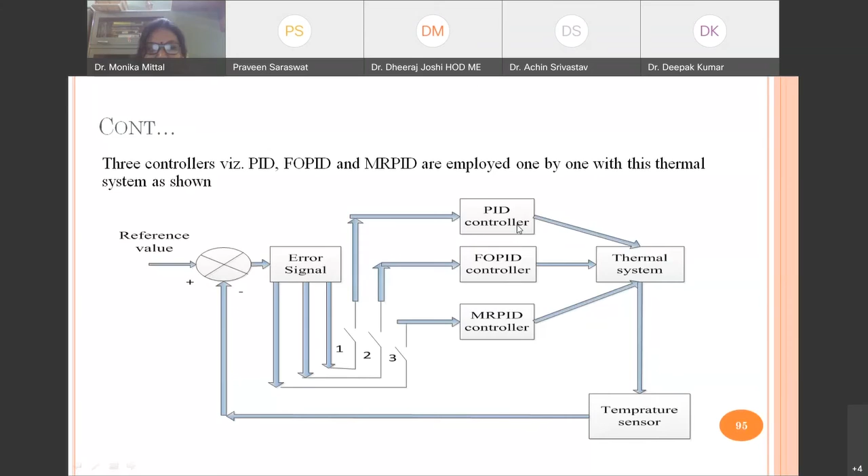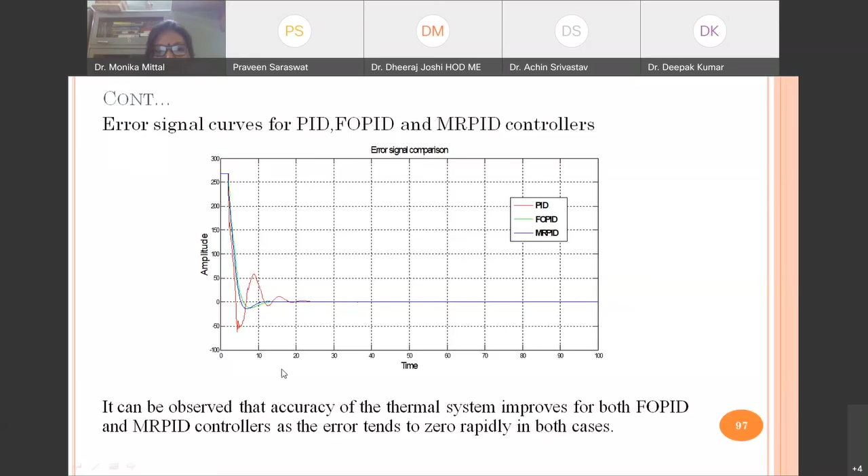In FOPID, two parameters are increased, so naturally it becomes more complicated compared to PID. So when noise is not there, PID works very effectively because it reaches quickly; the rise time is less. But what is the problem?

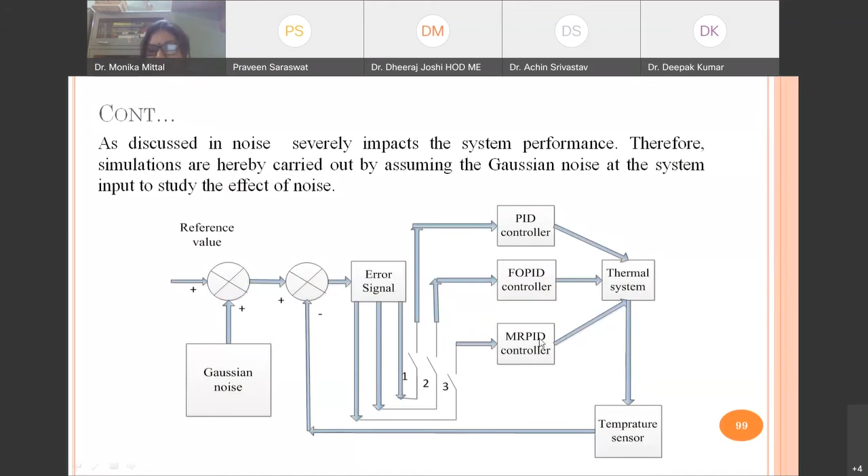That means switch 1 is connected, and switches 2 and 3 are not connected. Other things remain the same. In the second position, we connect FOPID. What will happen? Then at the third position, we connect the multi-resolution PID controller. So what will happen? Here also, for comparison, all three curves are drawn.

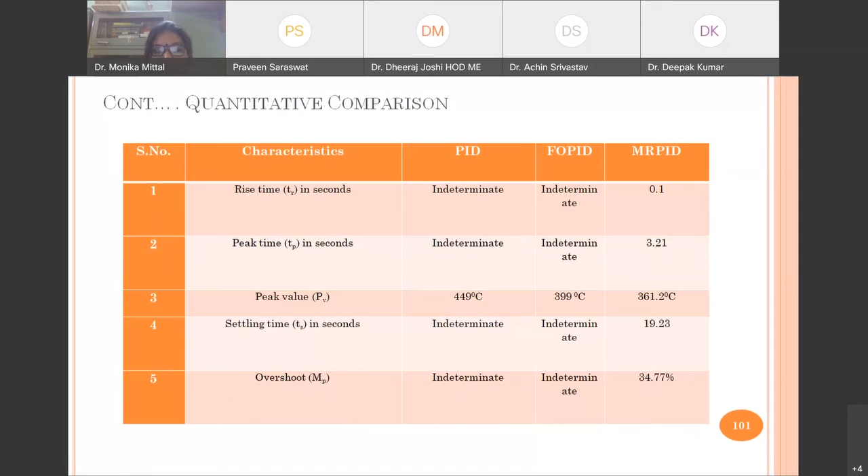So we have compared, and we can say the previous one shows that MRPID can work in the situation, but FOPID and PID can't work. But there is a chance that if we change the value of KH, KL, and KM and optimize it, then these parameters also we can improve. So this is the further improvement. But in the case of PID and FOPID, we can't improve because values are indeterminate.

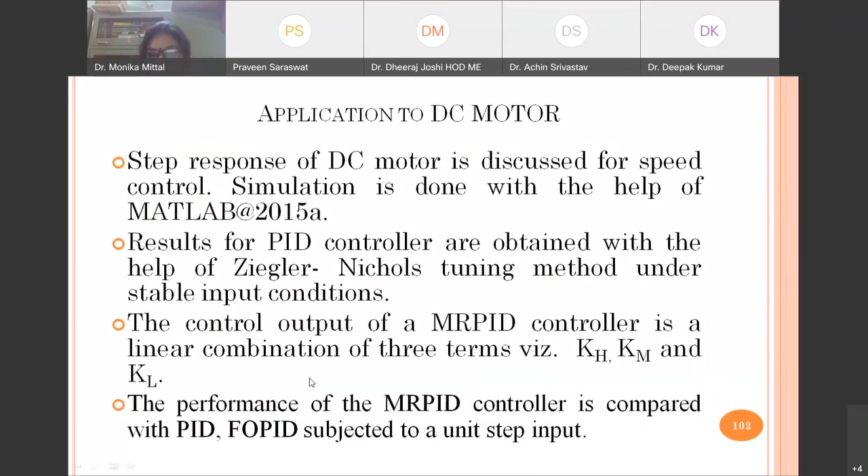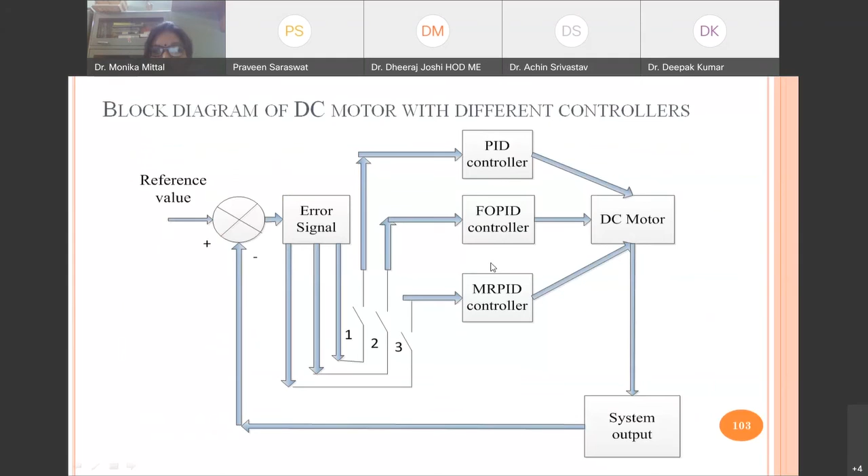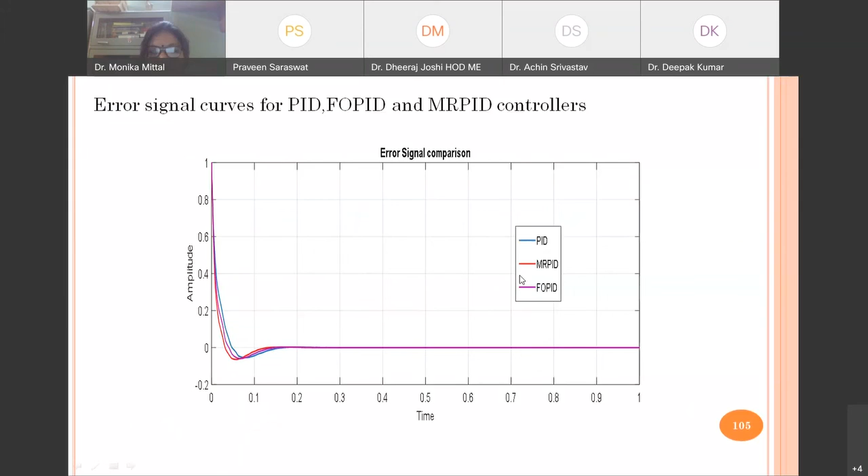So we can say now all are working very good. But if we compare all these controllers when Gaussian noise is added, then what will happen? Here the error is decomposed. We connect first of all PID controller, DC motor, system output. In the next case, we are connecting FOPID by switch 2. In the next case, we are connecting MRPID controller. So we have taken one by one, the same example, and observed the results.

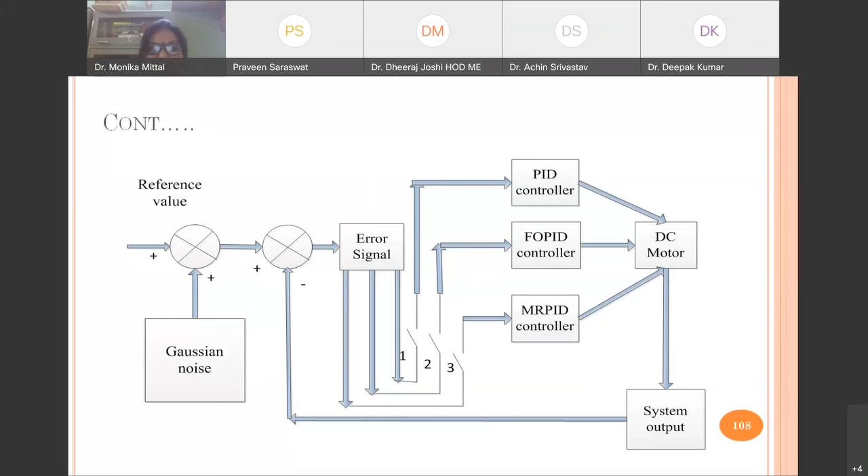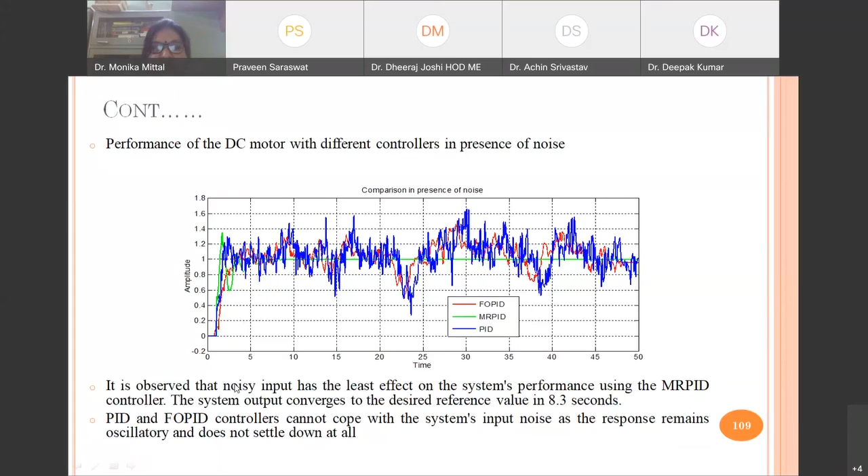This red one is FOPID, green one is for MRPID, and blue one is PID. PID characteristic is very bad. So it is observed that noisy input has least effect on the system performance using MRPID controller, because ultimately it settles down. Some oscillations are increased, but it settles down. The system output reaches the desired value at 8.3 seconds. That is very large, but it settles down. But in the case of PID and FOPID controller, the effect of the system noise is that the response remains oscillatory and does not settle down at all.

So what are the conclusions? The conclusion is that when there is noise, both PID controller and FOPID are not working properly. But in the case of MRPID, they can work.

So what should be the future direction? This is the latest controller used nowadays - starting from PID, then we go for FOPID, and then the latest we use multi-resolution property, and we have designed MRPID controller that can be used for both thermal system and DC motor. So these wavelet-based denoising techniques can be explored with intelligent control techniques - that means these gains can be calculated using some intelligent control techniques, which gives us better results as compared to the results which we obtain.

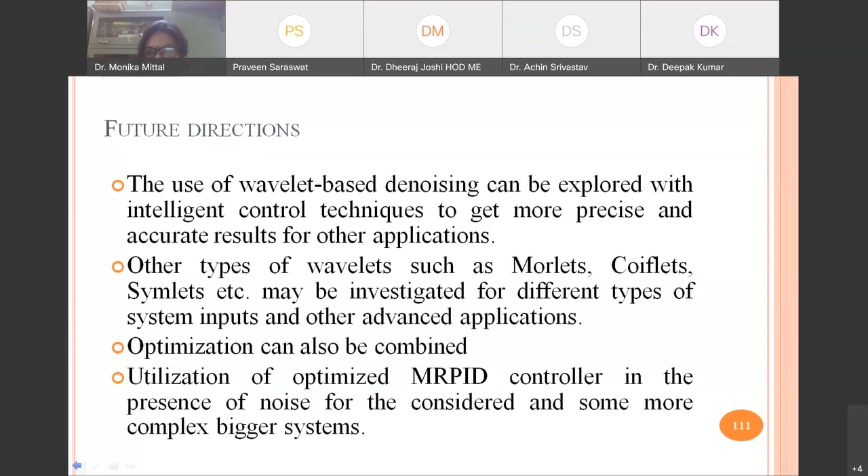So I think I have completed to the latest one, starting from the fundamental - what is a controller, what is its importance, then how we apply it. Then we have considered two applications, then we go for wavelet-based denoising method, FOPID, and then MRPID, which is the latest one. So I think I have completed all of the theory related to the controller to give an idea. If there is some query, you can ask. So I have completed my presentation.

Yes ma'am, honorable and dear participants, good noon. I am Dr. Deepak Kumar, faculty in Department of Mechanical Engineering, SKIT Jaipur. There are few queries I want to ask from the participant side.

First question, how can PID controller be incorporated in IoT? I have already explained what IoT is - in Internet of Things, everything is connected with internet. And when internet is connected, what is the requirement? Everything should work in a controlled manner - that means controller is an important thing. If controller is there, then the principle of controller is the same. In the case of IoT, we have to use a communication controller, because we have to communicate between this end and the other end. So the variable parameters are related to the communication parameters - only the change is that, otherwise the principle and theory are the same.

Yes ma'am. The second question from the same candidate, Ravindra N. Chavan - how can PID controller be compared with the microcontroller as far as IoT is concerned.